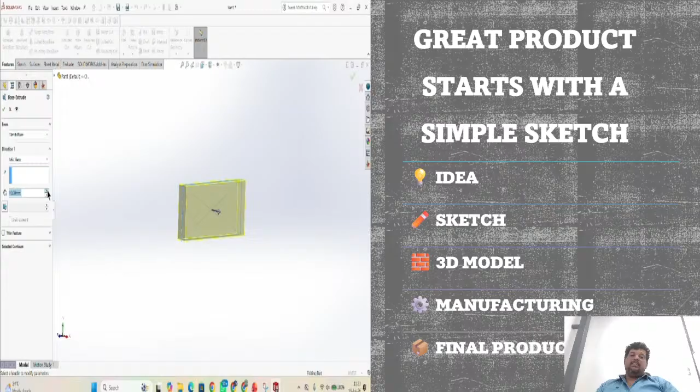So what are we going to discuss today? Today we are going to see how a great product starts. Every great product starts with a simple sketch. It begins as an idea that becomes a sketch, then becomes a 3D model, then goes to manufacturing, and finally into the final product. So this is the normal stage a product gets developed.

So what is there in this 3D modeling? From the sketch, when it goes to a 3D model, what is going to happen? Let us see that in detail. So, what is a 3D feature? A 3D feature will include conversion from a 2D sketch to a 3D result, which will include the features, and in the final stage, it will include the material, the shape, and the modifications. Now, what are we going to discuss here? So,

Let us discuss now. As you know, we are discussing SolidWorks today. What is SolidWorks first? SolidWorks is a parametric 3D modeling software, which was developed by a company called Dassault Systèmes. This Dassault Systèmes is the same team who has developed the software called CATIA. And this software has influenced the world so much that SolidWorks is considered the most simple software to do 3D operations. Now,

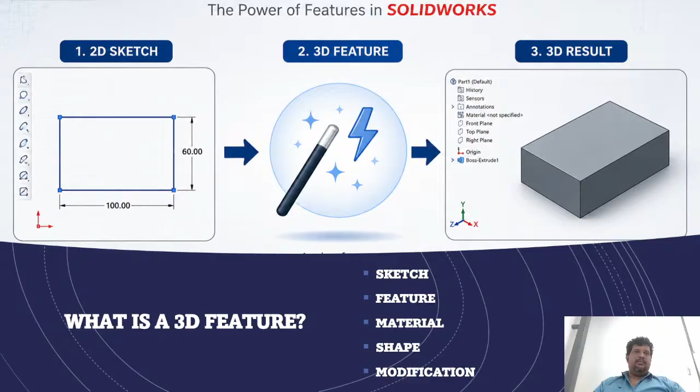We are going to discuss how to convert a 2D drawing into 3D here. 2D is like drawing with a pen on paper, which has only a length and a width. But when it comes to a 3D model, it will get a height also. So we'll get a three-dimensional work. So let's discuss each of the most used features in 3D modeling.

The first option is known as the extrude. So what is happening in extrude? Imagine you are making a cake or a bread at home. You roll a flat sheet of dough and then use a cutter to make a circle, a square, or maybe a star shape. At this stage, the dough is still flat. Now imagine that instead of staying flat, that shape suddenly starts growing upwards. It becomes thicker and thicker until it turns into a solid object. That's exactly what extrude does. It takes a flat sketch and gives it a thickness. In other words, it changes a two-dimensional drawing into a three-dimensional one.

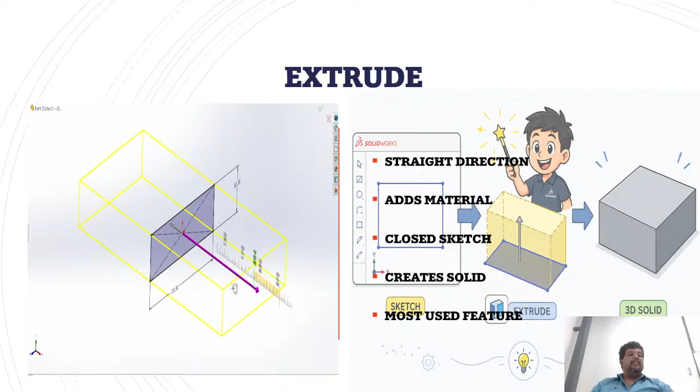And here is something interesting. If you open almost any mechanical part designed in SolidWorks, there is a very good chance that the first feature in the history is an extrude. It acts as the foundation for the model. Everything else is usually added or modified later.

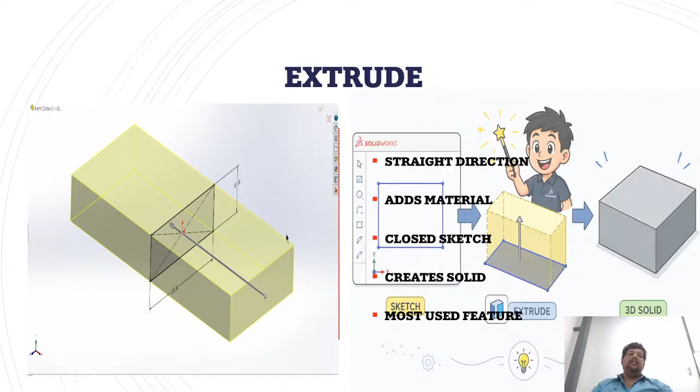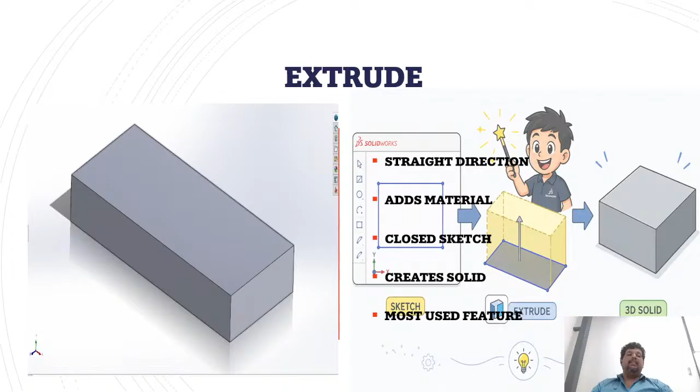So whenever you see a simple object with the same shape from one end to the other, ask yourself, could this have started with an extrude? Most of the time, the answer is yes. Now we have learned how to build a solid object by adding material. But what if we want to make holes, slots, or openings? Instead of adding material, we now need to remove it. That's where our next feature comes, that is the extruded cut.

So, we have just learned how extrude helps us build a solid object by adding material. Now, we are going to see how to make a hole through it. We cannot add anything, we have to remove some of the material, and that is exactly what this feature does. This feature is called the extruded cut. If the extrude is the builder, then extruded cut is the sculptor.

Think about a sculptor creating a beautiful statue from a large block of stone. The statue isn't created by adding more stone, it's created by carefully removing the unwanted parts. Little by little, the final shape appears. Extruded cut works in the same way. First, we create a solid model, then we draw another sketch on one of its surfaces. This sketch tells SolidWorks exactly where we want to remove the material.

And once we apply the extruded cut feature, SolidWorks cuts through the model in a straight direction following the shape of the sketch. That's why you will see straight direction shown in the slide. Now, what is the difference between extrude and extruded cut? Extrude builds, extruded cut removes. Extruded cut is the straight opposite of extrude.

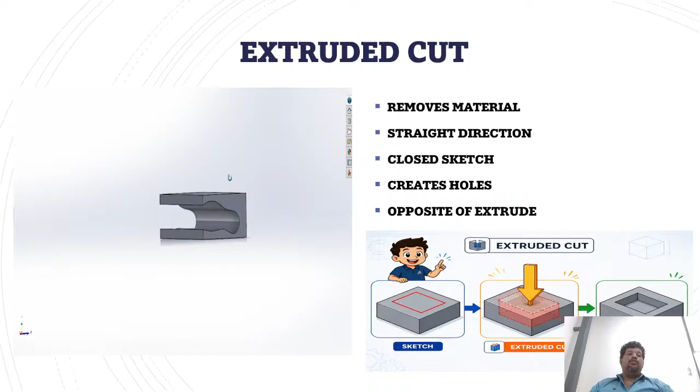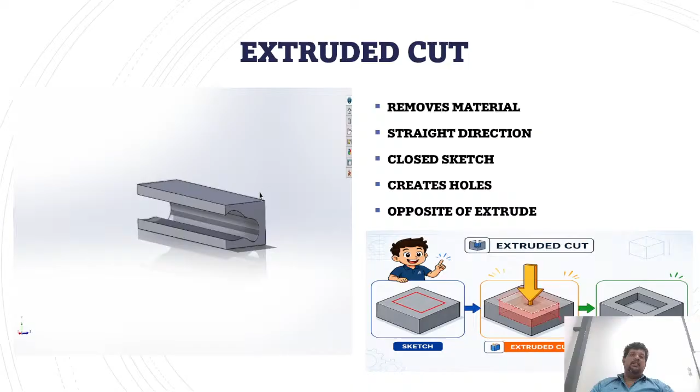Now, with both of these, it will go only in a straight line. We can either go back or forward, or top or bottom. So, what if we want to go in a curved motion? That is where our later features will come.

So we have seen one way of creating a 3D model. We start with a sketch and move in a straight direction. That's how extrude works. Now about different types of products. Look around your home for a moment. A water bottle, a rolling pin, a candle stand, a flower vase, a pulley, a machine shaft. Do you notice there's something common about all of them? They are round. If we try to create these only using extrude, it would take a lot of extra work. There has to be an easier way, and that's where revolve comes in.

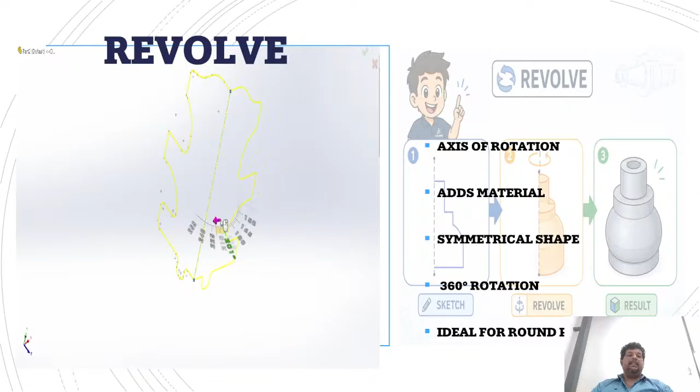Imagine a pottery workshop. A potter places a lump of clay on a spinning wheel. As the wheel turns, the potter gently shapes the clay with his hands. What's interesting is that the potter does not sculpt the entire pot from every side. He only shapes one side while the clay keeps spinning. Slowly, the beautiful pot takes shape. SolidWorks also works in the same way. Instead of spinning the clay, it spins the sketch.

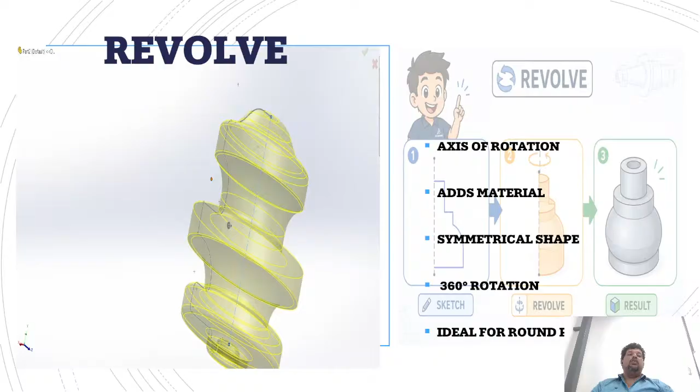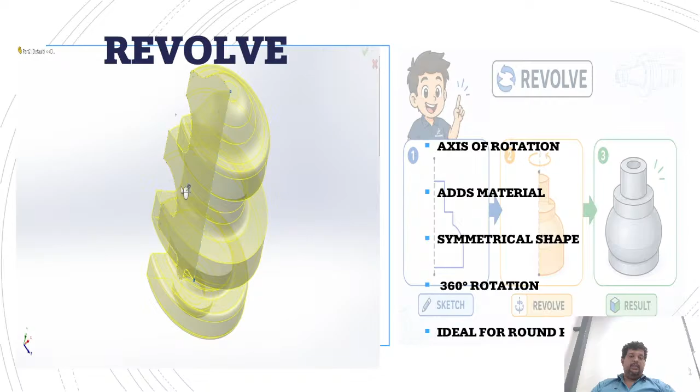First, we draw the profile of the object, then we draw a center line called the axis of rotation, and this axis acts as the center of the pottery wheel. When we use the revolve feature, SolidWorks spins the sketch around this axis through a full 360 degrees, or if you want, we can go to lesser degrees like 90 or 270 or 359 or whatever we want. Within seconds, a complete 3D model is created. That is revolve. This is most ideal for round symmetrical parts.

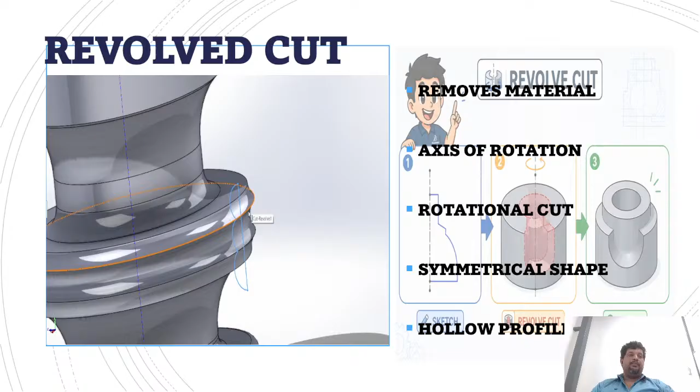Next is the revolved cut. As I told, extruded cut is the opposite of extrude. So revolved cut is the opposite of revolve. We just learned how the revolve feature helps us create round objects by spinning a sketch around an axis. Now let's imagine something. Suppose you have designed a solid pulley for a machine. It looks perfect. But then you realize something. The belt needs a groove to sit properly.

Now, when you see the drawing, it's completely solid. That will not be very useful because there is no space to hold anything. So what do we do? We don't build another object. Instead, we remove some material, and that's exactly what revolved cut is designed to do.

Like a carpenter using a wooden lathe, a wooden piece is kept spinning while the cutting tool gently removes material. Little by little, grooves, curves, and hollow sections begin to appear. This is exactly what happens inside SolidWorks also. Instead of adding material by spinning the sketch, we remove material by spinning it.

The process is very simple. First, we create a sketch showing the shape we want to remove. Next, we draw an axis of rotation. Finally, SolidWorks rotates that sketch around the axis and removes the material. Within a few seconds, a simple solid block can become a beautifully shaped component.

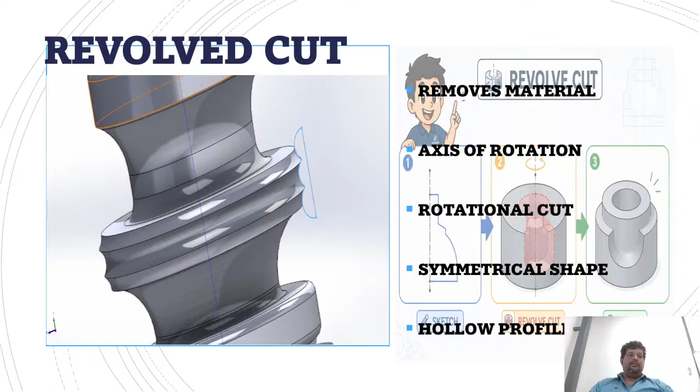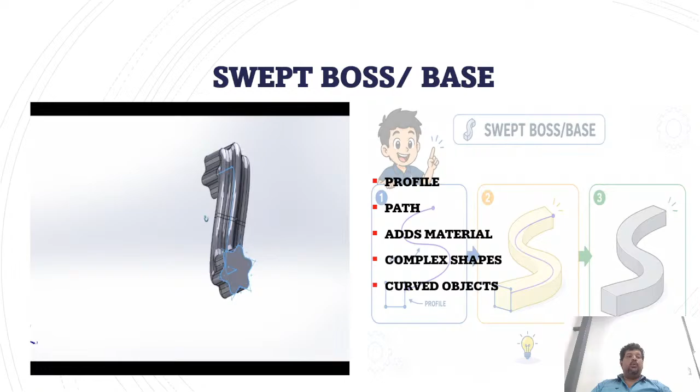Next. So far, we have learned two different ways of creating a 3D model. With extrude, we moved a sketch in a straight line, and with revolve, we spun a sketch around an axis. Now let's take a completely different situation. Suppose you're designing a water pipe for a building. Will that water pipe always go straight? No. It has to turn around corners. It may go up, down, left, right before reaching its destination.

So, what is common? Common is that these are not perfectly straight. They all follow a path. So how do we create shapes like this in SolidWorks? The answer is sweep. Imagine you are walking through fresh snow while carrying a flag. As you walk, the flag follows the exact path that you take. If you turn left, the flag turns left. If you climb a hill, the flag climbs with you. It never leaves your path.

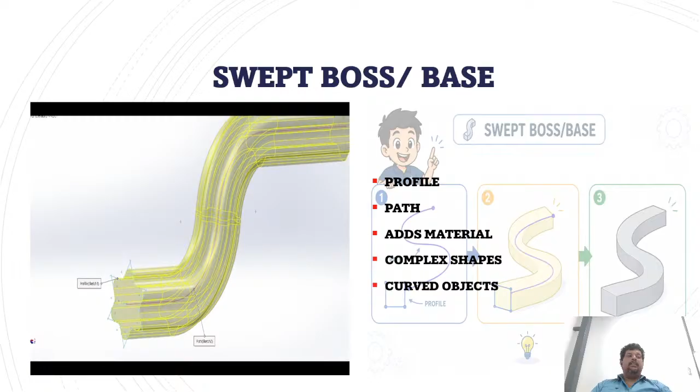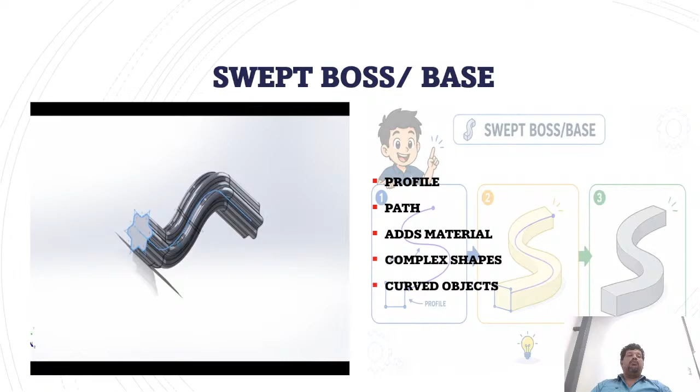Sweep works in exactly the same way. Instead of a flag, we have a profile. The profile can be a circle, rectangle, or any closed shape. Then we draw a path. The path is simply the route we want our shape to follow. When we use the sweep feature, SolidWorks moves the profile along that path and creates a solid model. That's why we see two important words in the slide, profile and path. Both are needed to create a sweep.

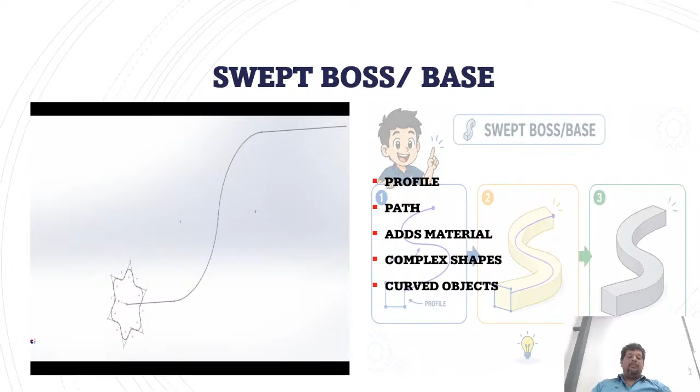And next is swept cut. Swept cut is actually the opposite of sweep. What is happening here? We have a solid block of material. Inside that block you want to create a curved passage, maybe for a wire, maybe for water to flow through, or maybe for air inside the machine.

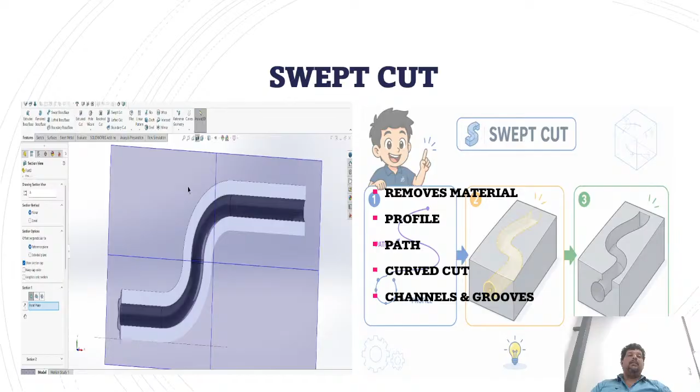Can we use an extruded cut? No. Why? Because extruded cut only moves in a straight line, and these products won't have a straight line. They have curves, bends, and smooth turns. That's exactly why we use swept cut. So for example, you can see in the image, we just select the profile and the path, and it will go cutting through.

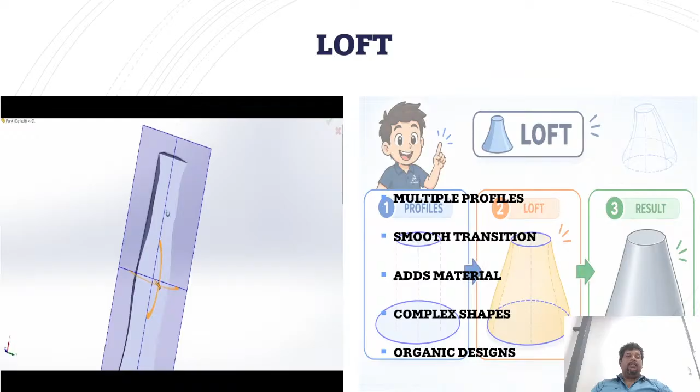Next is the loft. So far we explored some amazing ways of creating 3D models. We have pushed a sketch through extrude, we have spun it through revolve, and we have made it follow a path using sweep. But now let's imagine something different. Suppose you want to change a circle into a square. Can you do it in one step? No. There has to be a smooth change from one shape to another. And that's exactly what loft is designed to do.

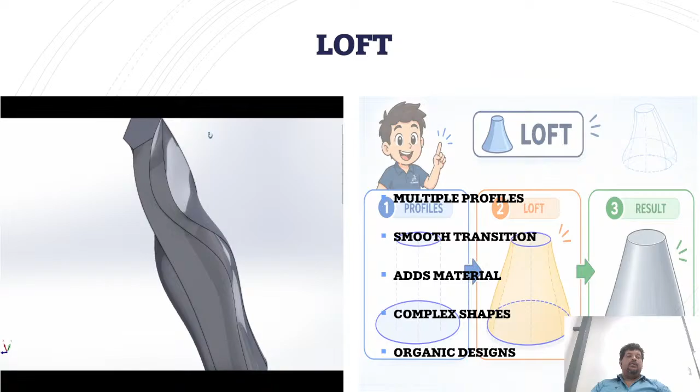First, we roll the clay into a circle. Then we shape the other end into a square. Now with your finger, you gently blend the two shapes together. That all happens while playing with clay. Similarly, instead of moving one sketch in a straight line or along a path, loft connects two or more different sketches and creates a smooth transition between them.

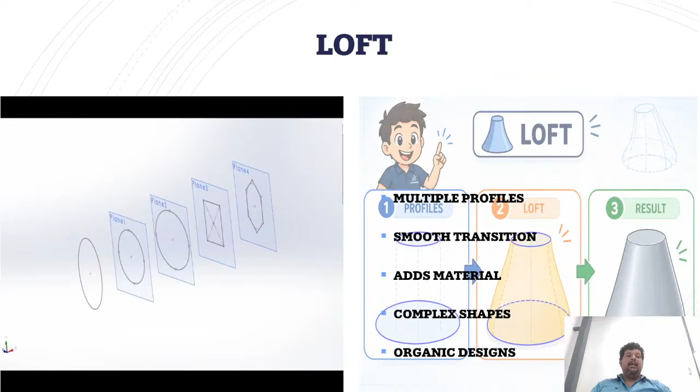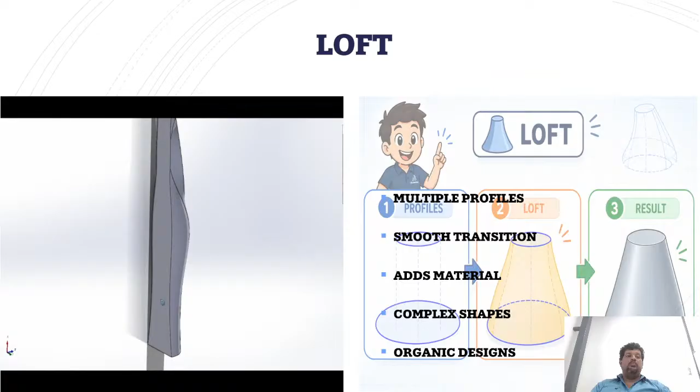Like, for example, a bottle. You can see the bottom is usually wide. As it goes up, it becomes narrower. The shape changes smoothly. Or a computer mouse: the front is different from the back, yet the entire body flows beautifully from one end to another. The aircraft wing: you notice that there are multiple profiles.

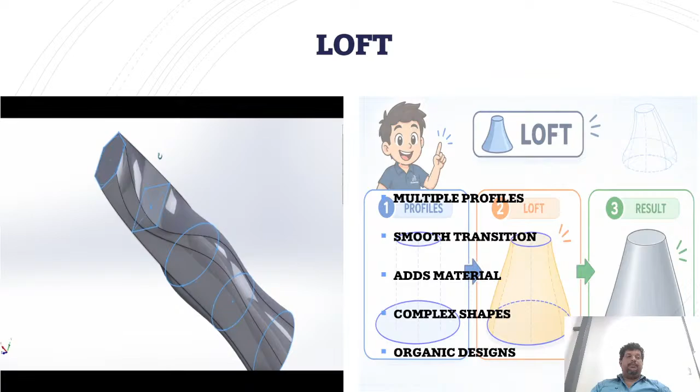That's why we need loft, because we need at least two or three sketches. You can also see smooth transition, which is the heart of the loft feature. Its purpose is to create a smooth connection between different shapes. This also adds material between different shapes.

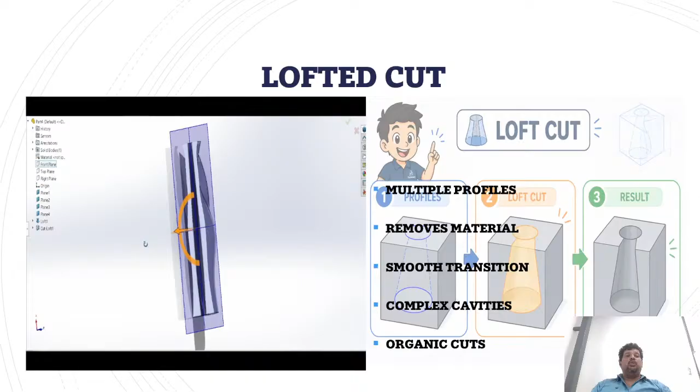As you have seen, the loft feature creates beautiful shapes by smoothly connecting different sketches. Now let's imagine the opposite. Instead of building a solid object, what if we want to remove material while the shape changes from one end to the other? That's exactly what loft cut does. Imagine you're designing an AC: air enters through a round pipe, but inside the machine, that air goes through a rectangular vent.

And here is a question: can we simply drill a hole all the way through? No. Can we make a rectangular hole from one end to the other? No, because the shape needs to change gradually as the air moves through the part. That is where loft cut becomes the perfect solution. It creates a smooth passage that changes from one shape to another while removing material.

So in loft cut, first we create two or more sketches with different shapes. Then SolidWorks connects them and removes the material between them. The result is a clean, smooth cavity inside the model.

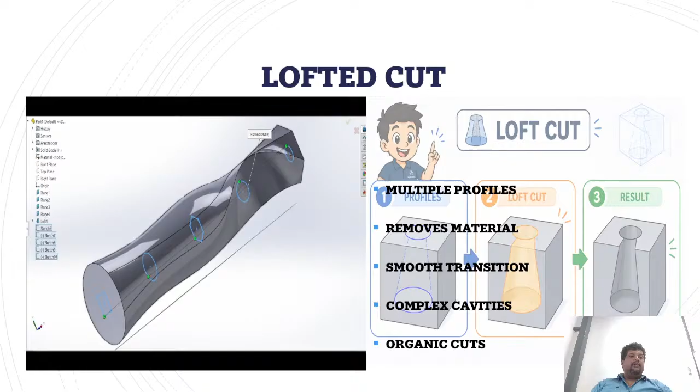The first one, we need multiple profiles here. Just like loft, this feature also needs more than one sketch. The biggest difference between loft and loft cut: loft builds and loft cut removes. You can also notice the smooth transition. That means the cut changes shape gradually instead of making sharp or sudden changes. This feature is commonly used where air, water, or metals need to flow smoothly.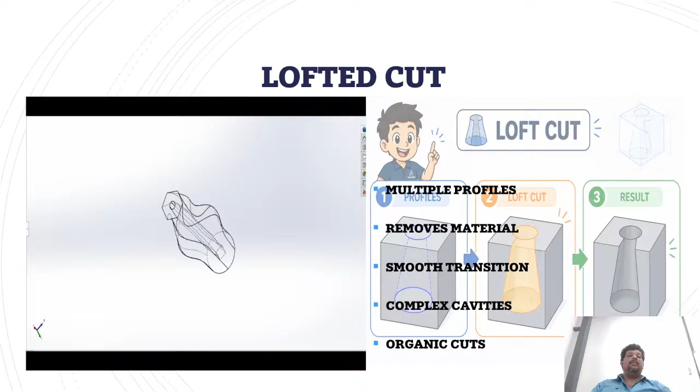So we have now explored the most important 3D features in SolidWorks one by one. But here is something interesting. Real products are never created just using one feature. They will be built by combining several features together. So let's pause a moment and look back at everything we learned today. When we started this webinar, we had nothing more than a simple sketch, just a few lines on the screen, nothing much. But now look at what those simple sketches can become.

We have learned how extrude builds a solid by moving a sketch in a straight direction. Extrude cut removes the material in a straight direction. Then we discovered revolve, where a sketch spins around its axis. Then revolved cut, where it removes material by spinning around the same axis. We explored sweep, where the profile follows a path to create the pipes. Then we looked at swept cut, which creates curved channels and passages by removing the material.

Then we learned about loft and loft cut, which allow one shape to smoothly change into another, making beautiful products and smooth internal passages. So these are different commands in SolidWorks, like a toolbox which has a hammer, a saw, screwdriver, measuring tape, etc. Each tool has a different purpose. A person cannot use just one tool to create an item, but we have to use the right tool at the right time. SolidWorks works exactly the same way.

Each feature has its own special job. Some features build, some remove. Some spin, some follow a path. Some connect different shapes. Individually they are simple, but when they are used together, they can create almost anything you can imagine. Even the parts used in cars, aircraft, medical equipment, and space technology all begin with the same basic ideas. That's what makes CAD so fascinating. This isn't about learning hundreds of complicated commands, it's about understanding a few powerful features and knowing when to use each one of them.

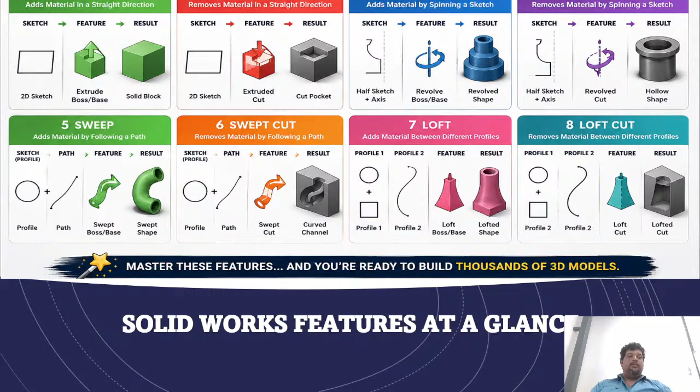Before we finish the webinar, let's take a few minutes to look back at everything we have learned since the session started. So as I told, extrude adds material in a straight direction and builds a model. Extruded cut removes material in a straight direction to create holes, slots, and openings. Revolve spins your sketch 360 degrees around an axis to create round shapes. Revolved cut spins your sketch around an axis to remove the material.

Sweep moves your profile along the path to create curves, pipes, and more. Swept cut moves your profile along the path to cut channels, slots, and passages. Loft is the blend between profiles to create smooth and complex shapes. Loft cut removes the material between profiles to create smooth internal cavities.